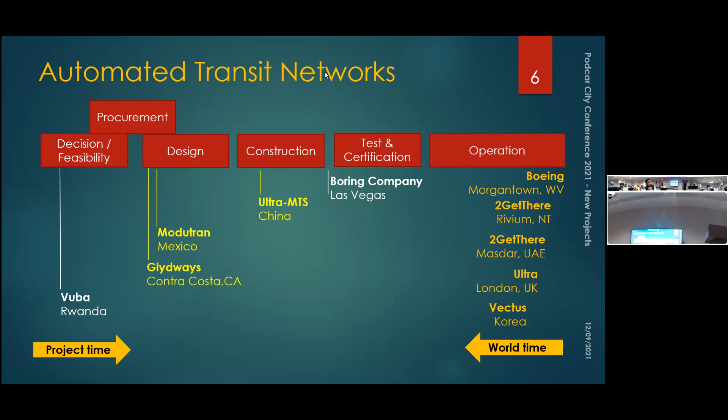Okay Alex, run. Okay, thank you for the introduction, Steve. Can you hear me well now in the auditorium? Sure, good. Well hello to everybody in Atlanta, thanks to Krista and to our hosts, it's a pleasure to be here. I'm going to share my screen now, if that's okay. Let me know if you have trouble, you may have to unshare yours. Just let me know when you're seeing my screen. Okay, 1 second. On the top, stop sharing. Thank you, okay we see you now, Alex.

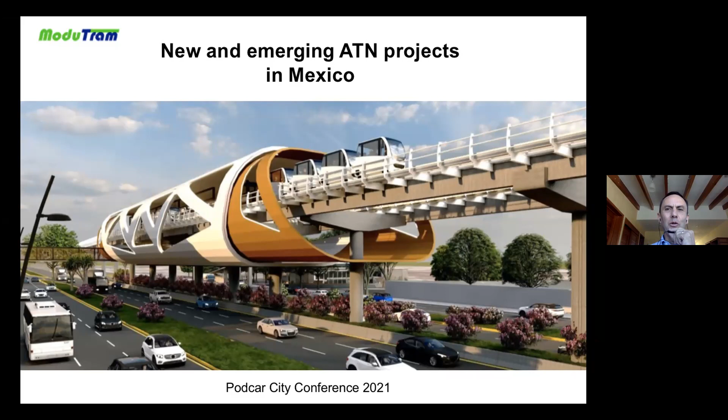The official title of my presentation is New and Emerging ATN Projects in Mexico, and I will be talking about that. But the subtitle to my presentation is what it really takes to implement a new rapid transit mode in a city.

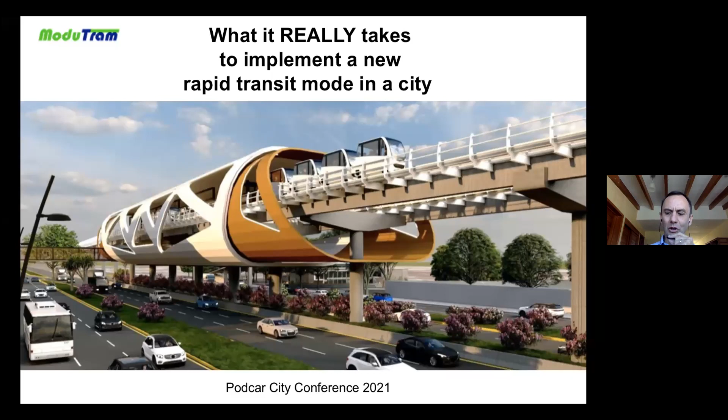This is based on the insight I have received over many years, and I think there are a couple of things worth sharing in terms of what we have learned. So I'm going to start by telling you what I thought when I first started Modutram, but also what we learned from early marketing efforts, and then later what we learned by participating in public-private partnership projects. And I will end by telling you what I know and what I don't know today.

So let's get started. In 2010, after already having worked for 20 years in the automotive industry, I decided to do something better. I knew that to implement a new rapid transit mode, automated transit networks, in a city, it would take several things. Number one, I already knew from the outset that it would take real hardware and real software, not just PowerPoint, to convince anybody that this was a real option.

To that end, we've been building and growing and improving our test and demo facility here in Guadalajara, Mexico. To date, we have run more than 2,000 hours of pseudo-commercial operation. That means it runs as if it were a commercial operation, not in test mode, but in real commercial operation mode. We've logged more than 70,000 kilometers of vehicle trips, and we've served more than 160,000 passengers.

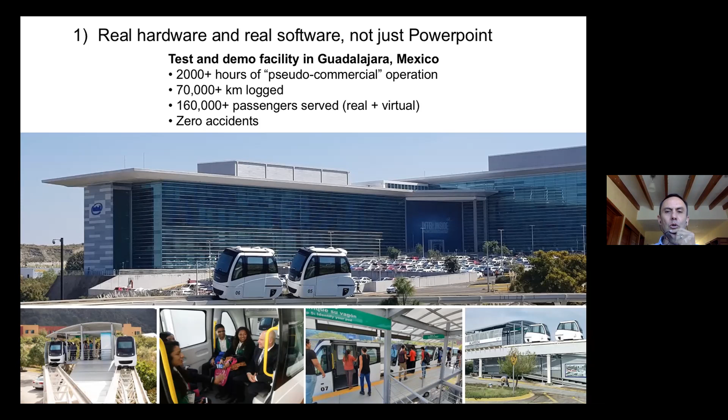In that time, we've had zero accidents, and what you're seeing here are pictures, not computer renderings, of our test facility in Mexico. I also knew from the outset that it would take a package solution and an established supply chain in place. And that's what we've been building over these last couple of years - partnerships with strong companies that can really deliver once an order is signed and the time to deliver comes.

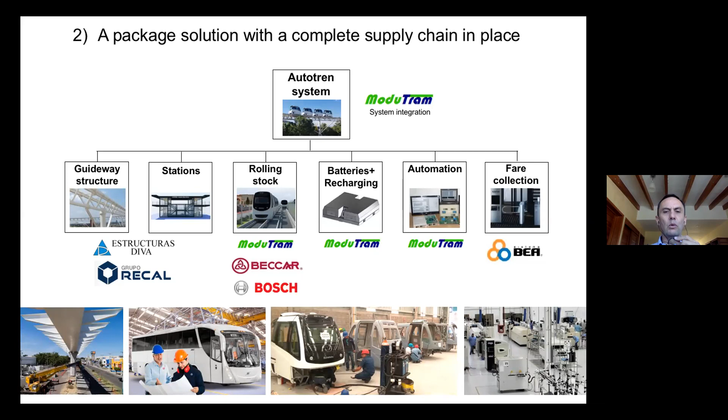Some of the companies we work with, for example Recal here in Mexico, is a major manufacturer and erector of steel structures. They do more than 150,000 tons of steel structures per year. And also we work with established companies from the automotive industry.

Number 3, I knew that it would take target cities with a real need for additional transit infrastructure. And those are abundant here in Mexico.

In Mexico, there are 20 some cities, or maybe a little bit more, that have urban populations with more than 750,000 inhabitants. In those cities, there's a total of 66 million people, and those cities have 280 kilometers of metro, 38 kilometers of light rail, 463 kilometers of bus rapid transit, 25 kilometers of cable, so a total of 806 kilometers of mass rapid transit - in other words, transit with dedicated right-of-ways.

If you divide this number of kilometers by the total population, the 66 million, that amounts to 12 kilometers per million inhabitants. If we make a comparison with Europe, in European cities that number is 27. And that's what allows many, many people in Europe to actually use transit as their primary mode of travel for their daily needs.

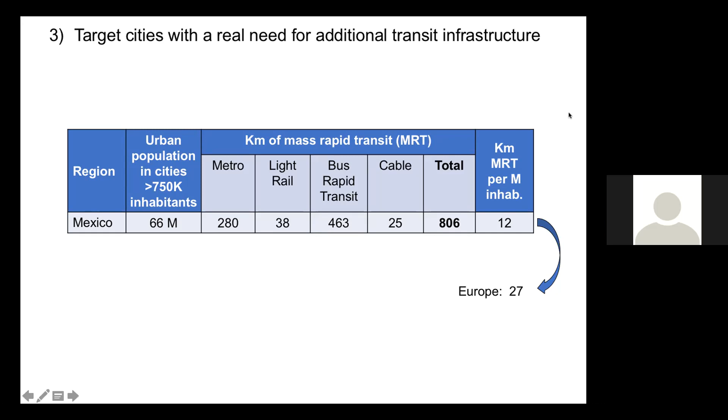And if you look at other countries in Latin America or Asia or Africa, that number, the number of kilometers per million inhabitants, is even lower. These are countries with emerging economies. There are many that have just 3 or 4 kilometers per million inhabitants.

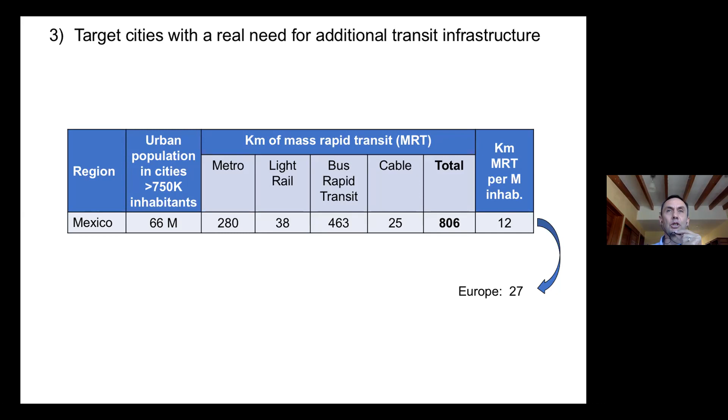Now, Mexican cities are clogged with congestion, and many of them were never designed for the number of cars that run on the streets today. So there really is a need for additional transit infrastructure. But that transit infrastructure has to be economically feasible.

We knew from the outset that we were competing against other transit modes, including bus rapid transit, which is a good transit mode if it fits. But the problem is it doesn't fit everywhere.

And that's why, for example, Mexico City's latest transit projects that they've been implementing have all been urban ropeways - because you just want to get off the ground. The problem with urban ropeways is that they're very slow, and they also don't have the types of capacities that are needed in these rapidly growing and highly dense cities.

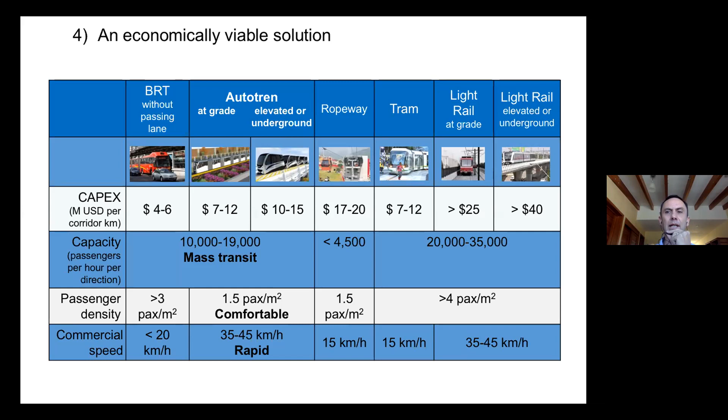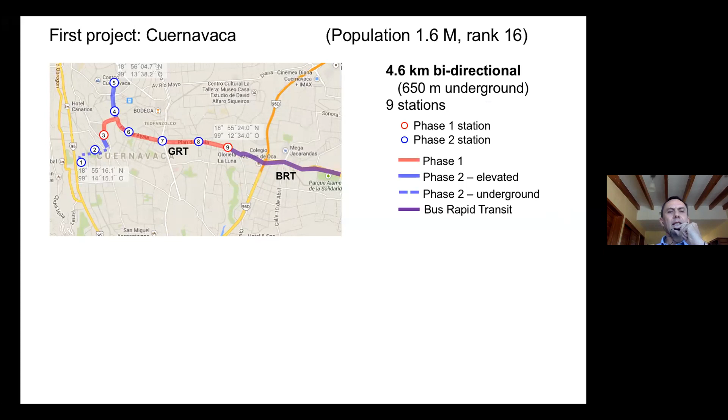So our first project in Mexico was in the city called Cuernavaca. It was a project that was, from the outset, seen to be a joint project with a bus rapid transit line coming in from the east, where the streets were wide enough to accommodate a specific lane for buses. But going further to the west, the streets become much narrower, as shown in this photo.

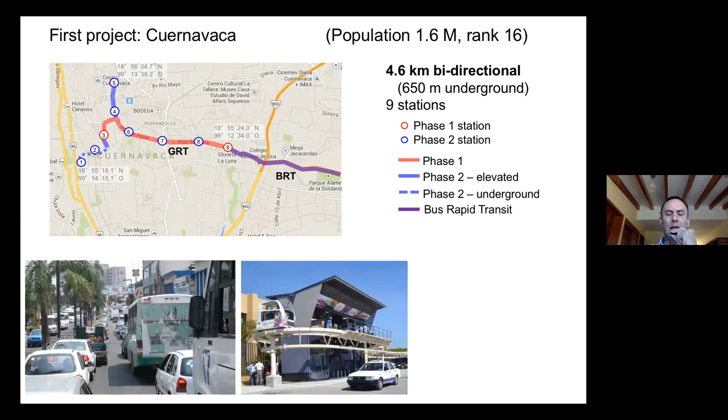On that avenue is where an elevated GRT line was planned. Initially, it would have just had 2 stations marked in red, number 3 and number 9, and then the others would have been added in a second phase. There would have even been an underground phase to get to the very center of the city in the historic center.

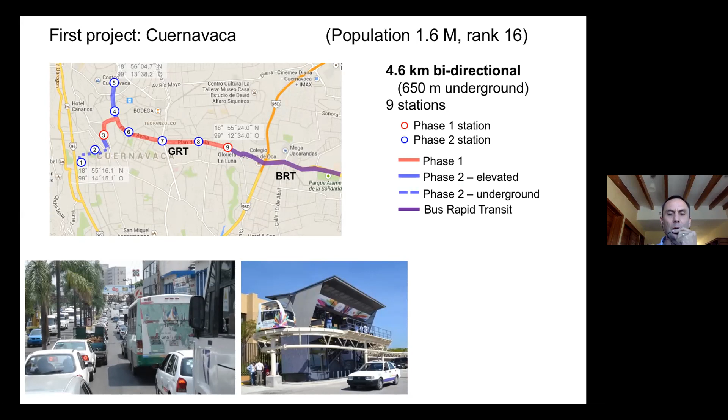In Cuernavaca, the government even contracted us to build a small demo facility at the convention center, which was operated during some events. And we showed them, in a computer rendering, what the solution would look like once it got implemented in the city.

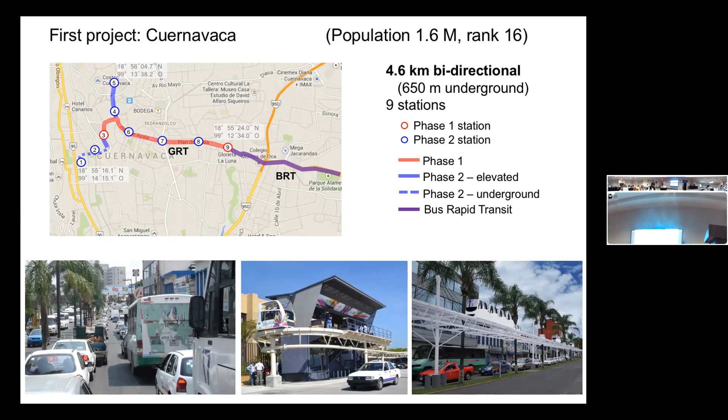But that project did not materialize. And so what we've learned in the process are a couple of things.

It not only takes what I just mentioned, it also takes real and robust hardware and software, not just any software, or not just any hardware. The problem with our demonstrator at the convention center in Cuernavaca is that it was really not seen as a real transit option. It looked way too much like something that belonged in a theme park more than in a city. That's why we've been updating and creating new products that are more robust.

That includes our vehicles that now have doors coming from a supplier to the mass transit industry, doors that can survive, with lifetimes of several hundred thousand cycles, 500,000 cycles, for example.

We're testing our new vehicles on dynamometers at speeds up to or even higher than 80 kilometers per hour. That's 50 miles per hour.

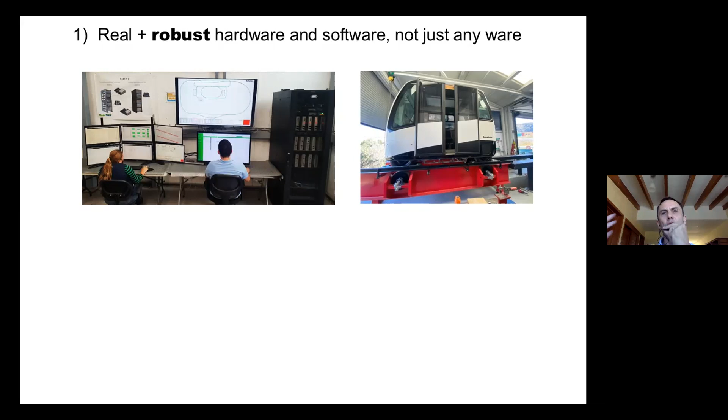Our emulators, for example, are now capable of running virtual and real vehicles on our test track at the same time, so we can now demonstrate complete city networks. This rack you can see on the right of the image contains the electronics for the virtual vehicles. We can pull these electronic units out and install them in real vehicles, and they will operate exactly the same as before. So there is no change to the electronics or the software in going from an emulated installation to the real installation. But it doesn't just take that, it also takes a robust organization, and that's what we've been building.

Number two, it takes backing from credible and renowned experts. That includes quality, safety certifications, and independent evaluations of compliance with recognized standards. And talking about standards, one thing that has really helped a lot is the inclusion of an official definition of an automated transit network in the ASCE Automated People Mover Standards. Because now we can really tell governments, this is what we're talking about, and it's not just something we've made up.

But very importantly, we learned that the solution had to not just be economically viable, it also had to be politically viable. Politicians making these decisions to implement these systems are worried about the reactions on social media when they present these projects to the public. They don't want to be flooded with memes that ridicule the projects. They want something that everybody, emotionally, from the first glance, will recognize as a credible solution.

And that's why our product has been changing and evolving over the years, from something that was meant initially for some tourist applications as a starting niche, to something that is really the final product for mass transit.

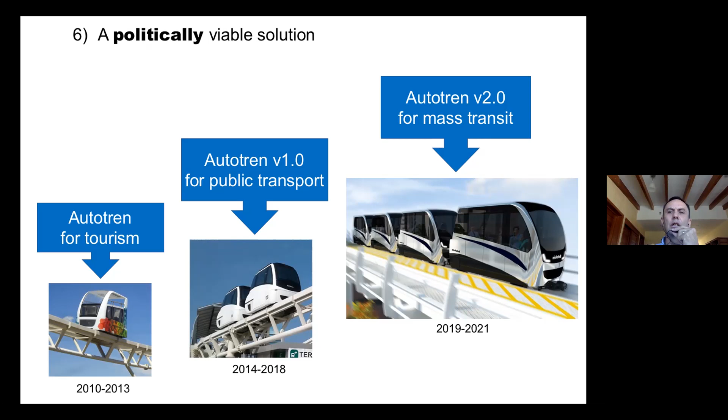Once we had done that, it was very easy to start the dialogue with a government that was interested in putting in a system, let's say, creating a ring around the city. This is a city in Mexico where they had considered a monorail a couple of years ago, but the monorail was way too expensive. When this government saw our solution, they said, this is exactly what we need. There was no more discussion about the capacity of small vehicles and things like that.

This is a city — I cannot give the name right now because the information is not all public. There are patches, some pieces of information that are public, but not the whole thing. Since the financial negotiations and business negotiations are still ongoing, I'm going to leave it at that, but I can describe the system.

It has a length of 13.5 kilometers, and then 7 kilometers in the second phase. The first phase will have 19 stations, between 60 and 125 driverless trains. The trains are combinations of two vehicles coupled, and they don't have to always stay coupled in two — they can also operate individually, or couple into longer trains when necessary at peak hours of the day. The ridership is expected to be 40 to 65,000 trips per day, and the total public investment is $135 million. It would be a public-private partnership, implemented in 24 months.

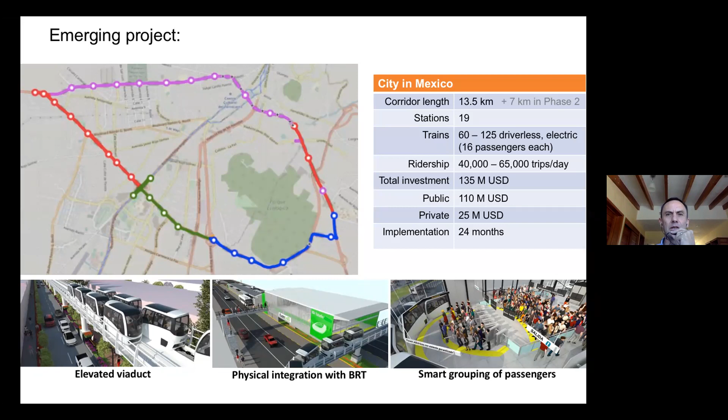You can see some images down at the bottom of what the system entails. So having passed through that and some other projects we're working on, including airport connectors, I can tell you now that it takes several other things: a well-connected and well-funded proposer, proponent, or developer.

The city of San Jose is considering an ATN solution or some advanced transit solution to connect the San Jose airport with a train station close by. They have recognized that to put in something like this as a public-private partnership, you need many different roles. One important role is that of a developer who will ultimately be the main counterpart to the city or government authorities in charge. You need somebody experienced in these PPP projects, and that has been our experience even in Mexico.

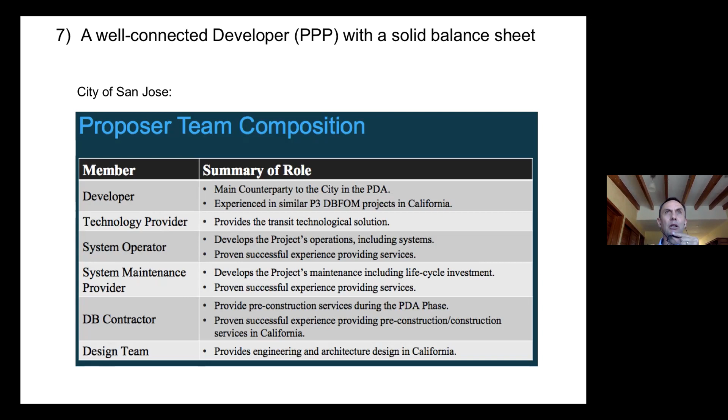So summarizing, these are the things we've found it takes, but it also takes good legal and financial advisors to assist the governments. In many cases, governments at the municipal or even state level have not done many PPP projects, and certainly not PPP transit projects. Add to that new technology projects, and that means the whole scenario of actually getting a contract with signatures in place is not that easy.

And sometimes the governments also have to learn in that process. That means it also takes a lot of political will, because there are roadblocks that come up constantly, and somebody has to figure out how to get this done and do it, not just tell me why it can't be done, okay?

So this is my list. I don't know today whether the list is complete, probably it's not, but we've probably got most of the important items on this list. So I just want to close by saying we're not there 100% yet, but we're very, very close. I really believe what Jeff Bezos said, and a couple of other people: every overnight success takes about 10 years to make. Thank you very much.

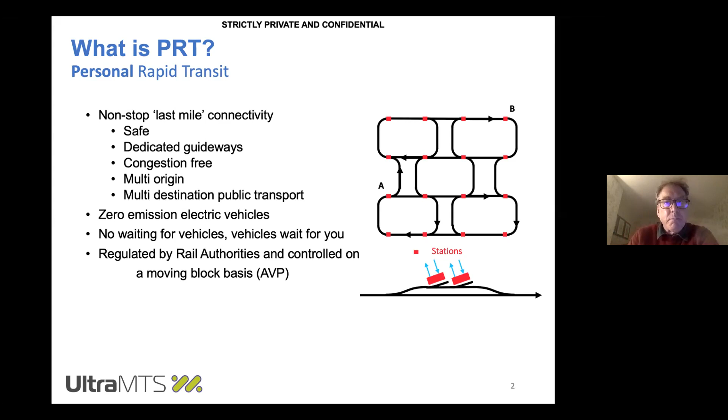So just to recap, Heathrow has been operating since 2010. The system is actually 3.8 kilometers of track. It's carried more than 2 million passengers. It's a commercial operation, and Heathrow make quite a good return every year on this. It has system availability of 99.7%. 82% of passengers don't wait at all. The average wait time is under 8 seconds. 4 million vehicle kilometers traveled so far, and it's got a 100% safety record.

And in that time, only one vehicle has broken down on the track. That's for the very simple reason that the vehicles are communicating with the main control system all the time. There are a number of performance parameters that the system keeps a measure of. If any vehicle falls below a parameter in any sense, it's pulled off into the workshop.

So that's the reason that happens. But there is one other important point about Heathrow that I want to put in now, because it informs what I'm going to say later.

There is a small hotel on the edge of the car park, top right on the screen, which was one of the worst hotels in the area around Heathrow, known as the Thistle. In about 2016, they came to see us and said, could they cut a hole in the fence and put in a turnstile so that the guests in the hotel could use the pod system to access Heathrow airport, rather than wait for the shuttle bus, which operates around Heathrow, where on average their guests were waiting 25 minutes for a shuttle bus and they might then get stuck in traffic. The end result was that they put a turnstile in at their own expense. Heathrow charged each passenger £5 each way, so that's around $7 each way.

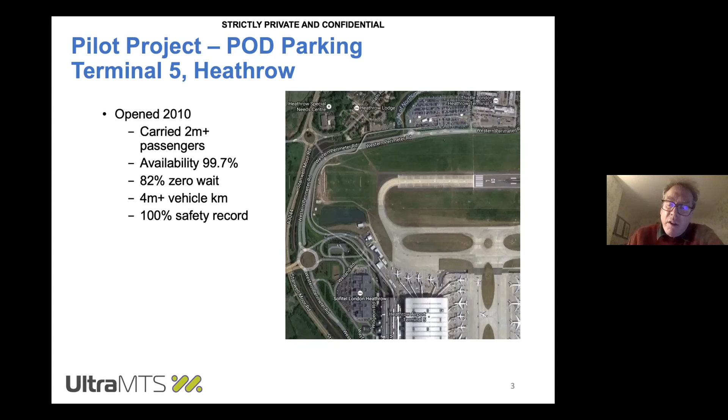100,000 passengers used it over year one. So from the Heathrow pod system perspective, that was £1 million of income from the investment in a small turnstile. But from the Thistle Hotel's point of view, which is the important point, their occupancy rate went up from 60% to 90%, and their rack rate was able to improve as well, making it an economical hotel rather than a loss-making one. That's one of the most important aspects of this.

So now we come to Chengdu. We were approached initially by the Chinese in 2016. We'd already hosted them at Heathrow twice. I went to Chengdu in July 2016, and they basically said, we've decided that we want to put a PRT system into the new airport that we're building.

This is part of the Belt and Road project at Chengdu. They are also building an aerotropolis outside the airport, and their view would be that this would be put into the airport but would then extend into the aerotropolis. They were quite clear they wanted a replication of Heathrow updated for modern technology.

We signed a cooperation agreement initially with China Railways Engineering. That was necessary really because, as Alexander would recognize, we're a very small startup business effectively. China Railways has a turnover of $90 billion a year. They were a reasonably good-sized company, and they built most of the world's high-speed rail.

They wanted to introduce PRT into China more broadly. There was a tender process, but it was clear from fairly early on there weren't going to be very many bidders. When it was completed, there had been only one bid made by us. Chinese law requires 3 bids for any public project. So there then had to be a special additional process, which lasted 2 weeks, in which people were asked to express an interest, and nobody did. The law was then satisfied and contracts were signed.

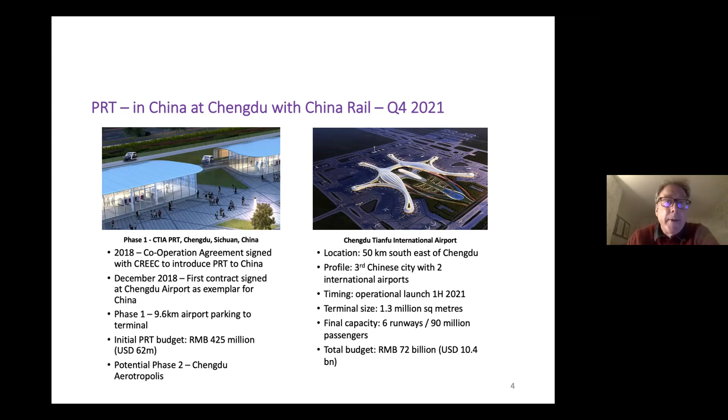So those are the simple comparisons. They're really, as you can see, very similar. But the truth is that there are some big changes between Heathrow and Chengdu, and the 10 years that have passed means battery technology is very much better than it was 10 years ago, and so is electrical motor technology. Those 2 things alone give some huge efficiency gains to the whole system. So what was attractive 10 years ago in economic terms is now very attractive.

This is the overall design, very simple, but that distance there is about 4 kilometers, just over 4 kilometers. You can see on the left-hand side the 2 terminals. I'll show some photographs in a moment. The system goes to the 2 of them, then running straight back down to the car parking. The aerotropolis is to the north of this, so it would extend up to there, but there are also airport developments to the south, which can be taken in future phases.

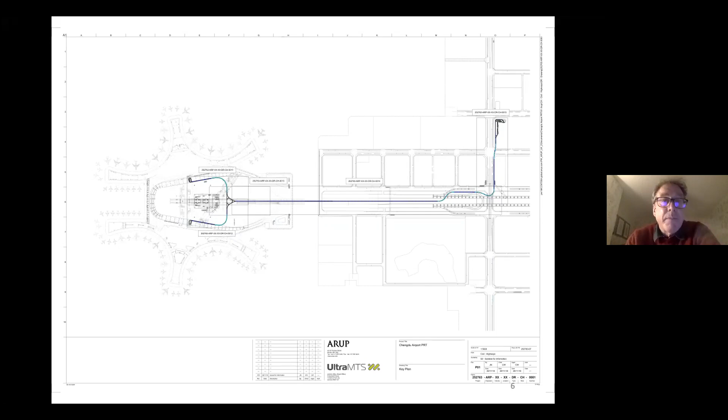And here is the airport under construction now. So those are the 2 terminals. There will be 6 terminals in the final fully completed version. The PRT actually runs from the top of the picture down.

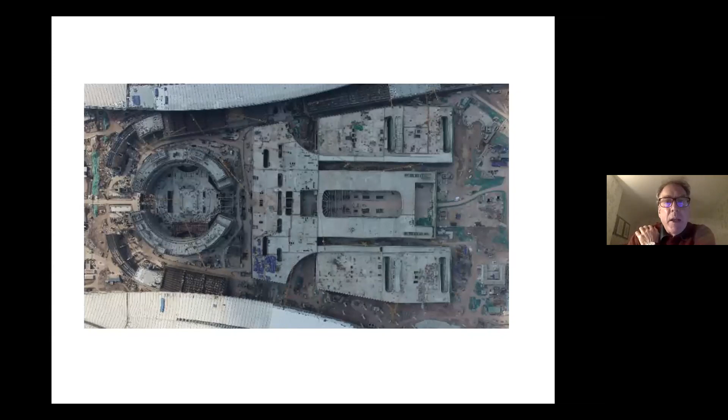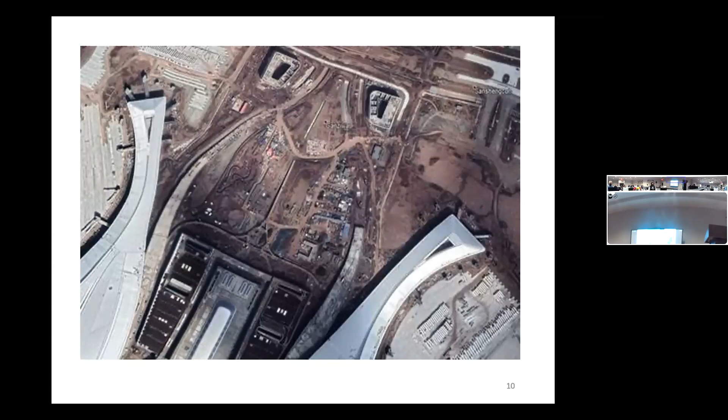As you can see, this is where the PRT will come in on the left-hand side here. You can see slightly better, again, coming down towards us from the north. And even better here, the rather thin construction you can see there is the PRT system coming down from the top. Then there's a roundabout there, which is actually distribution between the 2 terminals, and the stations are underneath. There are 2 more stations in the car park.

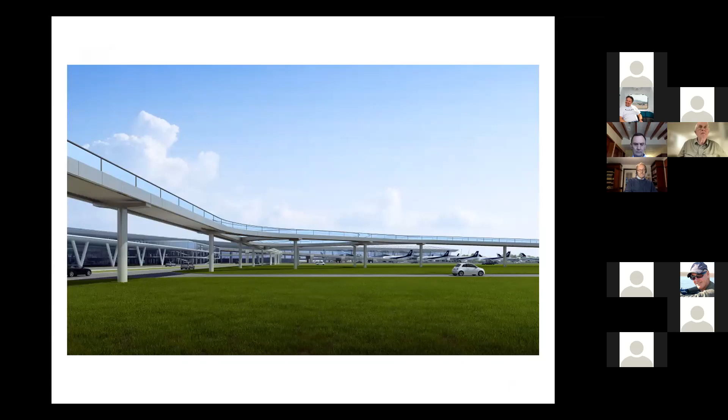There we go, that's what the track looks like. And that is the station and the car park. A slightly better picture of overall, just to give you a feel. The building on the top there with PRT written on it is the control room. That will also have the workshop for the servicing of vehicles. And there are the 2 stations in the car park as it stands.

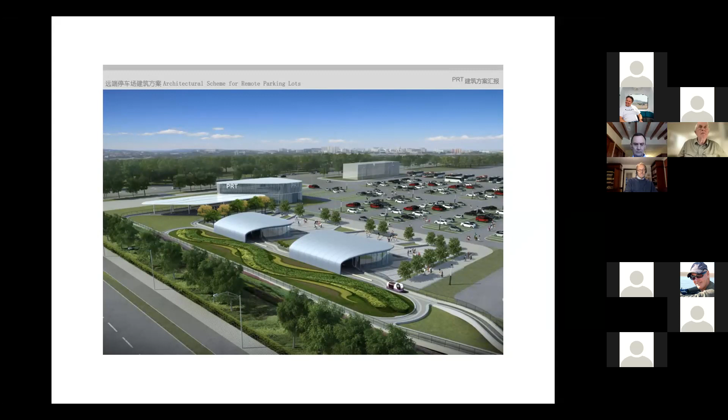Those are now all under construction. The opening date is scheduled for next year.

So I just want to reflect on some of the things that Alexander's been talking about. Why has PRT uptake been so slow, and what have we learned since 2010? Traditionally, we've looked at this from the point of view of engineering, then design, then politics, and then money. Almost all projects seem to start with engineers gathering around and saying, can we do this? And what can we design? And what would it look like? How many stations do we need? How many vehicles do we need? And so forth. The thing I have learned above all is that is simply the wrong way around.

You will not build a PRT system unless you start with money. How are you going to pay for this? Because if you can't answer that question, if you're simply saying, we would like a large amount of public money please, you won't get there.

There are all sorts of reasons for believing that PRT is unlike public transportation, and this matters more than anything else: the fact that the vehicles are very small and very light means that your infrastructure is very, very light. The Ultra system and Glydways have the loading of a footbridge. That means two things: one, the actual raw costs of the infrastructure are small, but most importantly, the degree to which you need to disturb the surface and under the surface of cities, which means interfering with utilities, a massively expensive thing to do, is reduced dramatically.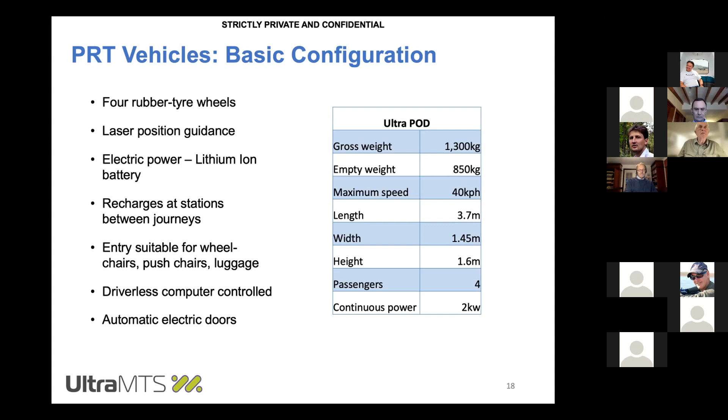But that's the point. If you look at cities, and we're now in discussion about putting what we think will be the world's first urban system when we've built it, these are the objectives in any city you talk to.

So I hosted the mayor of one of the largest cities in Texas at Heathrow, and he set out for me the things that we need to see in any public transportation system in order to get people out of their cars in Texas. And that's a legitimate question. It's a very big issue for the States, where you have very few cities with significant public transportation systems that are used by the majority of the population.

If I say to you that in the UK, in London, 85% of commuter journeys are undertaken on public transportation, and that's in a city of 8.5 million people. It's quite unlike anywhere else in the UK, where it's the other way around - it's no more than 15%, because they don't have metros by and large. But that's the issue that you're having to deal with.

In fact, I suspect in the States, the biggest issue is if you can get people out of their cars 1 mile earlier than they normally would, you transform the center of your urban area, because the use of space changes dramatically. So reducing congestion remains critical.

Improving the environment - the biggest change I've seen is the result of COP26. We're suddenly starting to talk to people in urban areas who are saying, we have a net zero target for 2030, how do we do it? And they can only do it by getting the cars out.

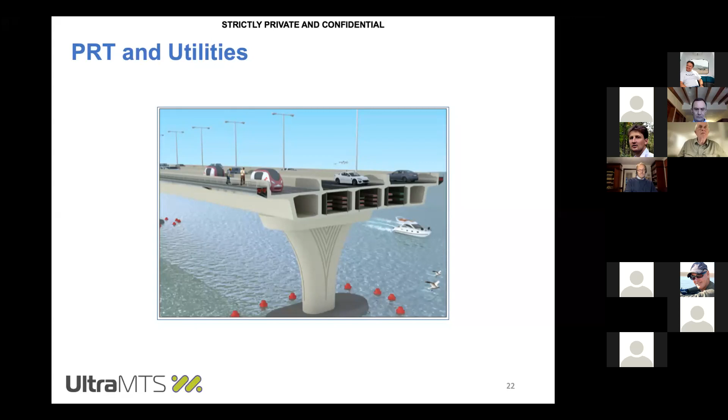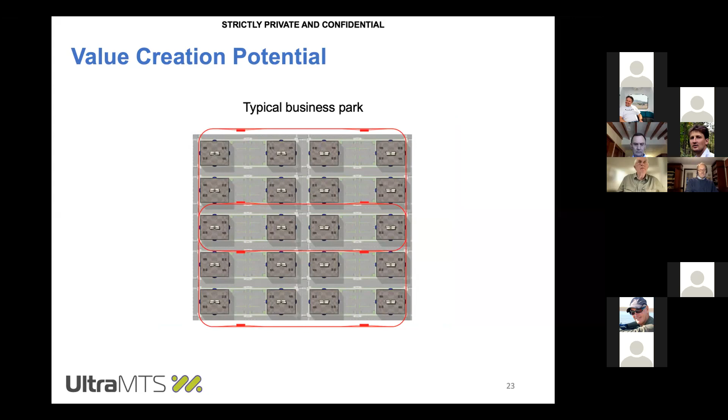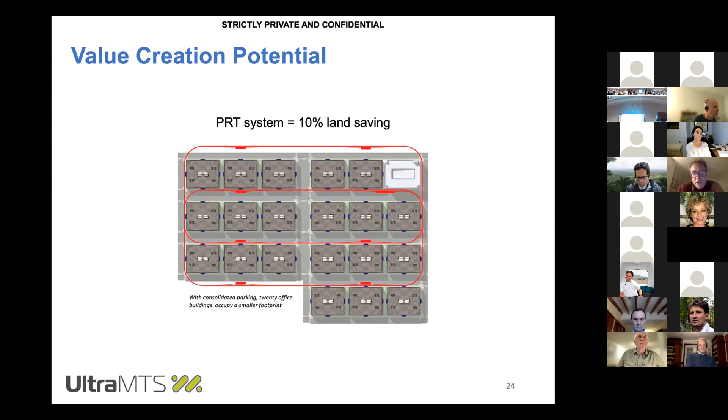Just a quick economic point in support of how you'd do this in the States. Here's a typical business park, 20 offices, each requiring quite a lot of parking between the buildings for the people working there. If you replace one of those with a multi-story car park, you can put in your 20 buildings and make a 10% land saving for the same number of offices. But if you then moved the car park a mile away to much cheaper land, you make a 15% plus saving on land—and that includes the cost of the PRT system. So economically, you've suddenly got a very viable unit for how you end up paying for your system.

We think the enhancement to existing public transportation is critical here. This is a European example—I think in the States you'd probably find this wouldn't work quite the same way; you'd end up doing it as park and ride, I suspect. But most studies will tell you that putting in better connectivity between your transport hubs increases the use of existing transportation networks.

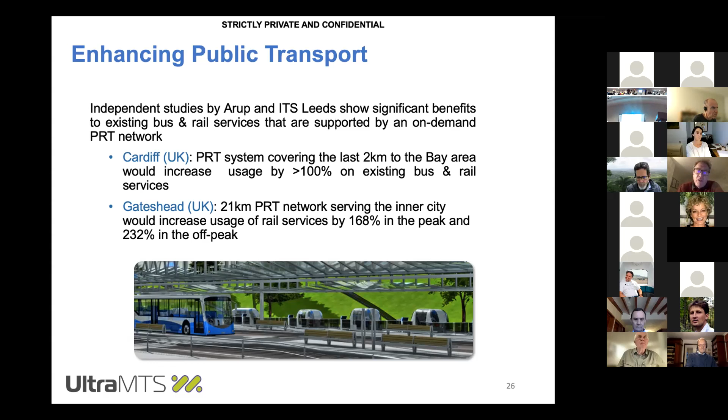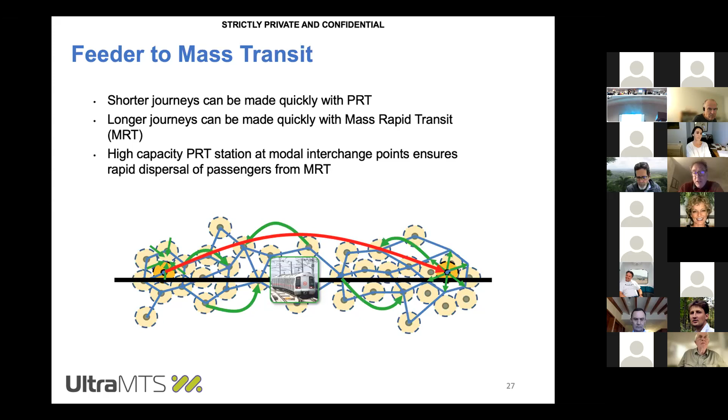That's okay. So what we're talking about, fundamentally, is feeder and distribution from mass transit—that's what works for cities, and that's really how one needs to think about it. I think people need to consider all of these options. The slide that came up earlier, looking at these comparisons, is pretty accurate, we think. The most important thing about PRT is that it deals with congestion and allows you to utterly change the attractiveness of the center of your urban areas.

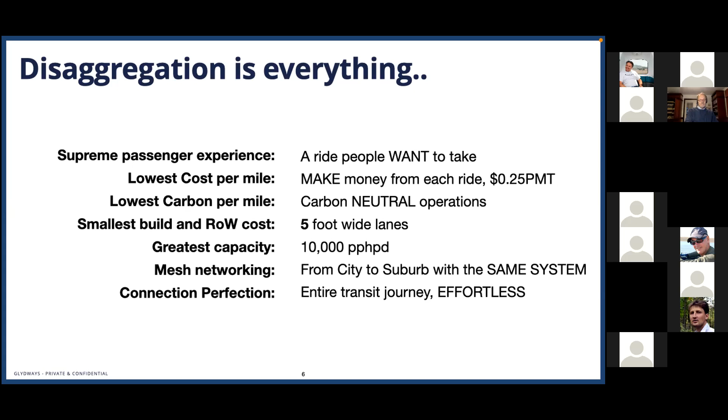Glydways is a new on-demand public transportation system, available anytime. It's made possible through the power of disaggregation, completely, everything from top to bottom. That means the entire system, the infrastructure, the vehicle, the control system, the access points, everything is disaggregated. Every single part of the system is independent and robust to failure.

So you've got continuous flow. That means the trunk links, the thing that carries all the capacity, always flows, never stops. It's like a perfect highway, right?

You've got offline, completely bi-directional access points. This is key because we don't want someone to go a direction they don't want to go. You can access every access point from both directions and then leave in either direction. Every single point is a pinched loop, which means you don't need any looping infrastructure or backing up. It could be a complete line.

You can have a trunk, you can have branches coming off the trunk. Everything is possible. Every access spot is fully disaggregated, meaning every access spot can take as long as it needs for a passenger to board or depart. You can take 2 minutes, you're elderly, you drop your groceries, whatever, that's fine. That is your spot. Take your time, do it the way you need to do it.

We want to provide access in the best way possible. We want to remove all barriers to access to public transit, and this is the way to do it. Fully disaggregated for every single person. And of course, the Glydways central management system to run it all, because this is the entire system.

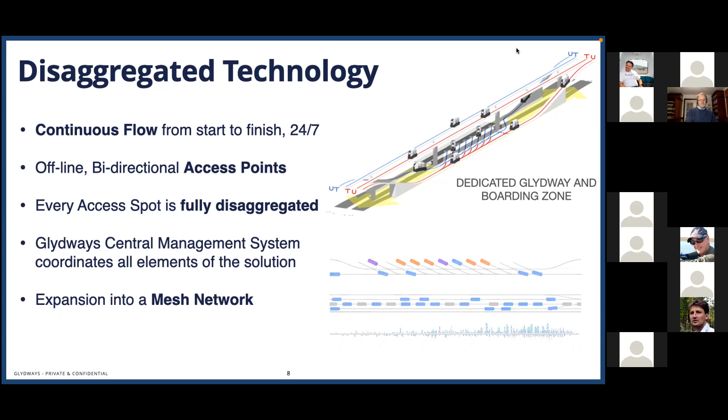By having a personal ride and not sharing it, we're not basing on the lowest common denominator, we're basing on the highest common denominator. You can do that, your car. We're trying to make it as good as your own car, but within the realms, you know, here.

But you can put a bike in there, you can put a wheelchair in there. It's all touchless. You can use your phone to call it, you can use a kiosk, of course. You've got all those things, but it's very, very efficient and a great user experience.

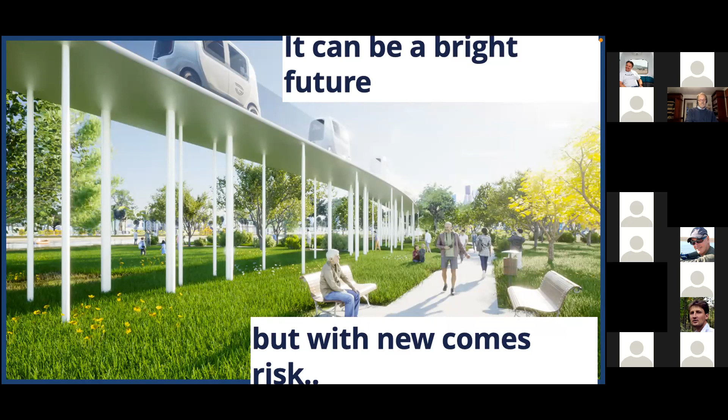Excellent. So the future can be totally bright. There's so many good things out here that we could do and we could deploy, but with anything new comes risk. And so that's been key.

Glydways was designed with risk in mind, completely. We've worked with the public over in California, which has a lot of requirements, and we've been working with the public hand in hand to understand their risk and understand how we can design this product not only to match their needs, but to also lower the risk of execution. And that's simple infrastructure, dumb, simple infrastructure.

What does that mean? Rubber tires on concrete. That means any kind of right-of-way that's available, we can retrofit to. That also means that later on, when level 5, level 4 is more developed and commoditized and inexpensive and everybody can afford it, we can come off that system, go into your suburb neighborhood, and drop you off right at your door. So compatible, forward and backwards, okay?

Anybody can build that infrastructure as well. So we'll talk about our partners.

Mature EV and robust autonomy. We are sourcing from existing supply chains: EV technology, batteries, motors, and autonomy. We are leveraging everything that's already out there, we're not inventing any of this stuff. So it's safe, and actually autonomy is so overdeveloped at this point that you can add layers of robustness with what's out there, trying to solve for level 5.

Funding flexibility, I talked about this a little bit earlier. Finance today at current transit fares, because we're making profit on them, and that profit can be used to bring in private capital to build out those systems with nothing down by the public.

Or lower your ticket price to improve equity. It's your choice. It's your city. It's your community. What do you want to do?

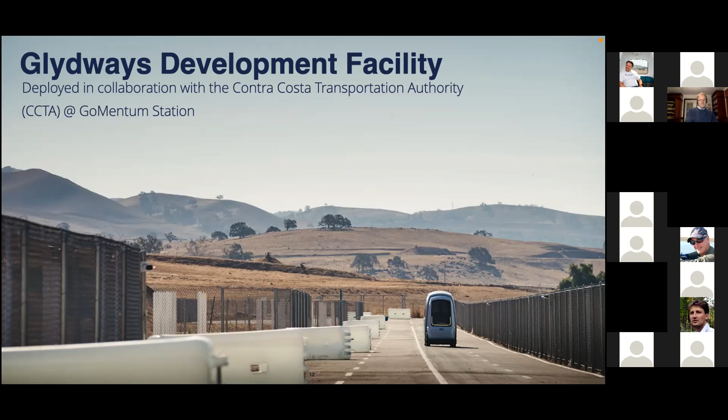Okay, next slide—our commercial pilots. We've spent a lot of time focusing on the Bay Area because it was our original intention: if we can deploy in California, we can deploy anywhere. We're going to be certified by the CPUC in California, which certifies rail, limo services, and more, so they're flexible and excited to certify us. We've got four projects: San Jose, South San Francisco, East Contra Costa County, and San Diego. We're going to go through three of these—we're not going to go through San Diego today.

San Jose is the first one, and this is just the start—we're moving millions of people with these systems every year.

San Jose: Diridon Station to Airport Phase 1. This was spoken about a little bit before—the city's been looking at this solution for like 20 years. They're trying to connect the airport. BART, the local train, completely missed the airport. How'd that happen? They couldn't decide which way to go, and the system wasn't flexible enough to get there. So the airport's still disconnected from mass transit. We're closing the link, connecting the airport to transit.

The airport's at the top, and downtown is Diridon Station, which is basically where BART goes. Caltrain goes there too, the light rail goes there, VTA buses go there—it's a big transit station with a huge amount of development down there. Google's going in and building a lot of stuff. So we're connecting that huge hub to the airport.

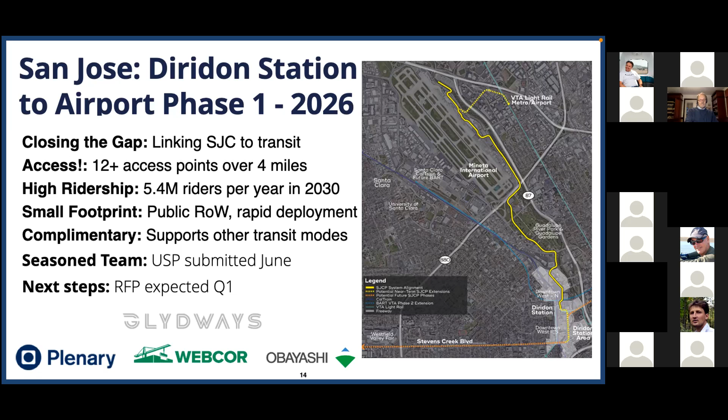Okay, next slide. And this is just the beginning, this is the start. You get the feet on the ground, then start to expand.

This is a flexible system. You don't need to do lines. That's where you start because that's how people think, and typically that's where existing right-of-way corridors exist. You start with lines, but then you start to branch, connecting existing transit, additional light rail stations, going downtown, going down Stevens Creek, a big boulevard, connecting big companies around there because everybody needs access to the system.

Oh, we're almost done. Thanks. And that's how we start to create a mesh network locally in this area.

And later on, we'll connect these things together, and you'll have multiple different ways to get to every destination. Just like it's been said before, every single destination on this map adds value to every other destination, because every access spot where you can get in the vehicle can go to any other access spot. So you don't even need to figure out which direction you want to head. It just goes.

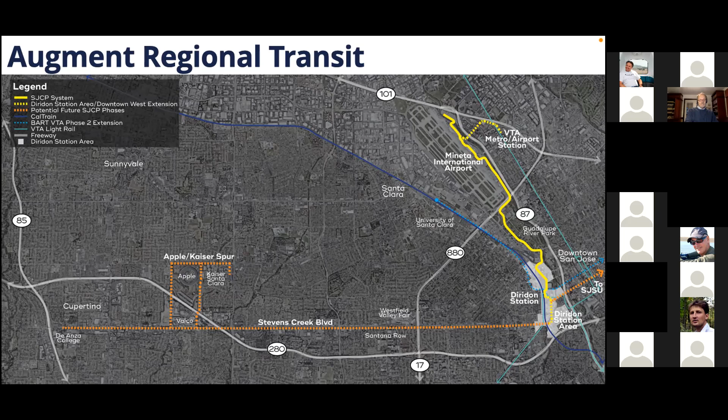Okay, next slide. Are we done? Maybe skip the visuals, we've got some other projects here. I want to keep conscious of the time.

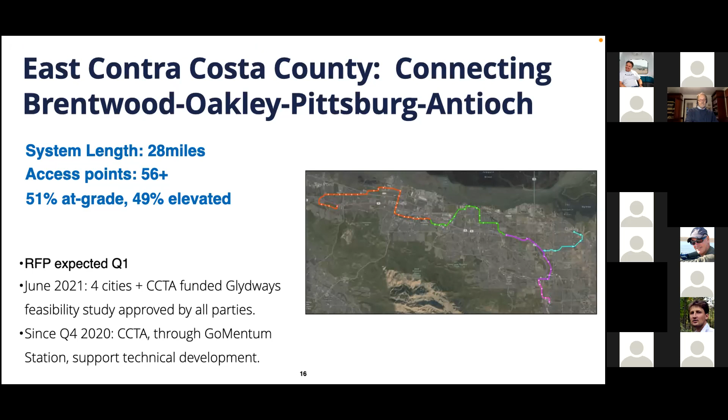All right, so let's skip to some pictures, just to show you some pictures in here. Just skip through a few more slides. There you go. Actually, go back up one. Go back up one. That one.

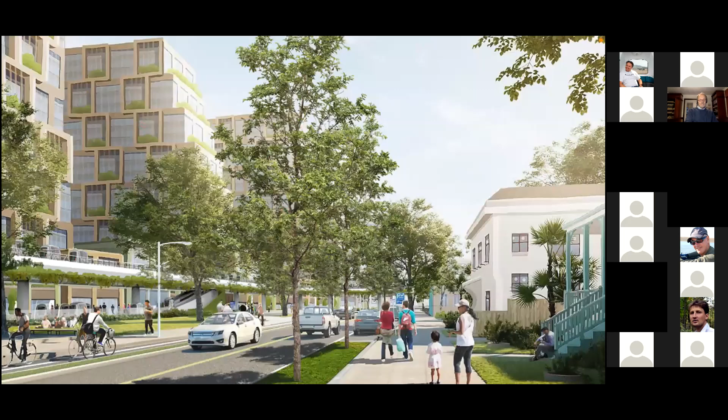And actually, a little bit earlier here, we come down to the ground. We're thinking of leveraging the existing road because it's a little bit overbuilt, putting a fence and putting our system directly on there so we don't have to build anything at all.

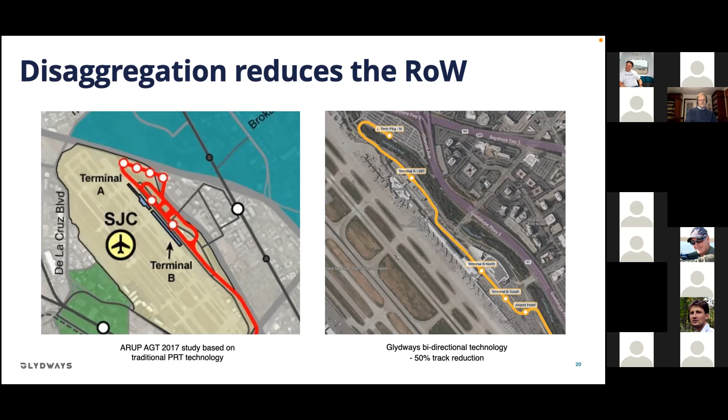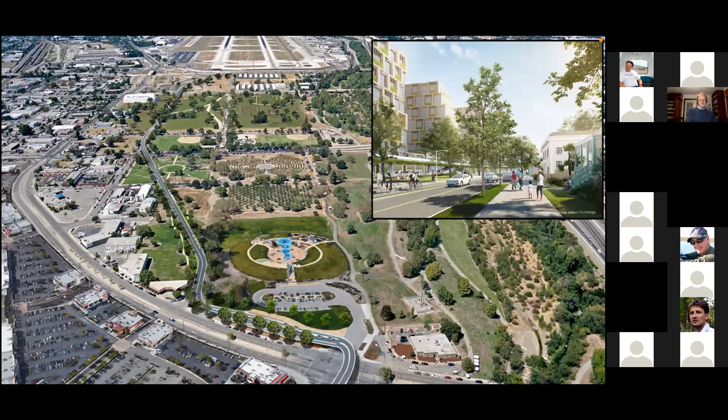So here's just some pictures of the system going through San Jose at different points. It's mostly about half elevated and half at grade, going through the park, adding value everywhere we go, because access leads to equity, and access and equity is value, and access is value.

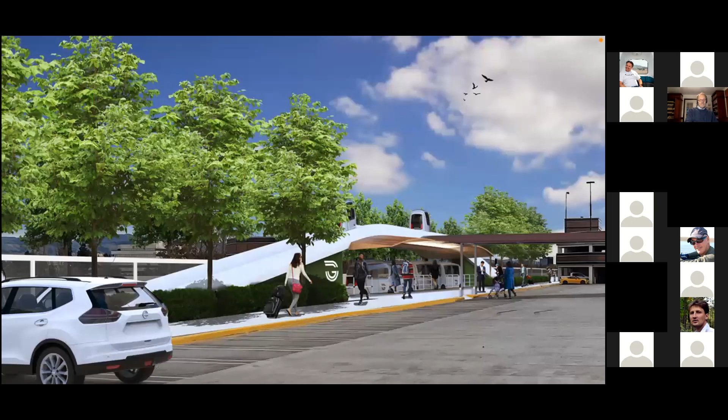One interesting one, if you go back a little bit — yeah, these are backup slides after this. So this is actually a point, one more back.

This just shows the flexibility of what a small vehicle and flexible infrastructure can do. This actually is onto the airport itself. It's difficult to access Terminal B, and so we went directly onto the parking structure — we're just going to build it directly onto there. You can't do that with a train or a bus.

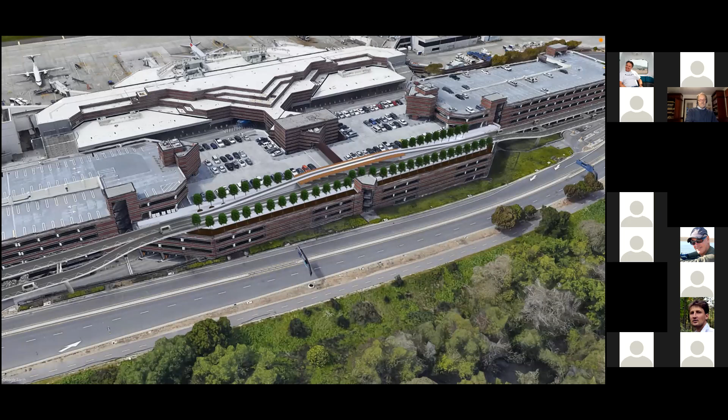And so providing access, because we're flexible enough to fit where nothing else will, designing a system that can effectively go, and can scale to the future — not just this system, but keep on going as technology develops.